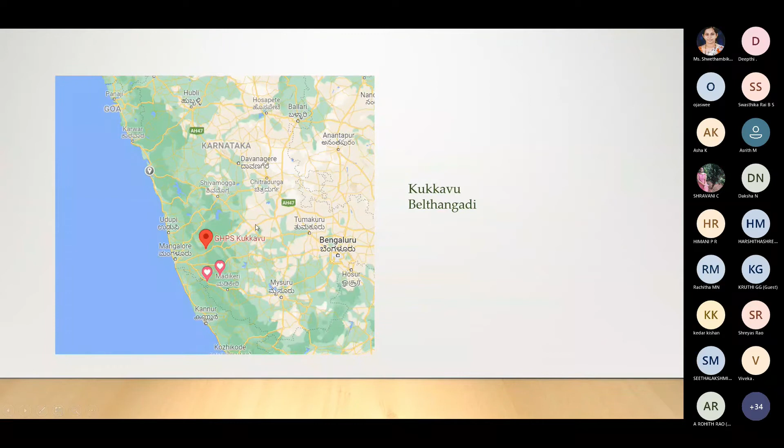Kukkavu is in Belthangadi Taluk, you can see the map here. It shows a government higher primary school, but it's the Kukkavu place. You can see a bridge here, the Kukkavu bridge, built across the Netravathi river at Kukkavu on the Somanthadka Didupe road. Some of you might have seen this or gone through this bridge. It's not like this now at present.

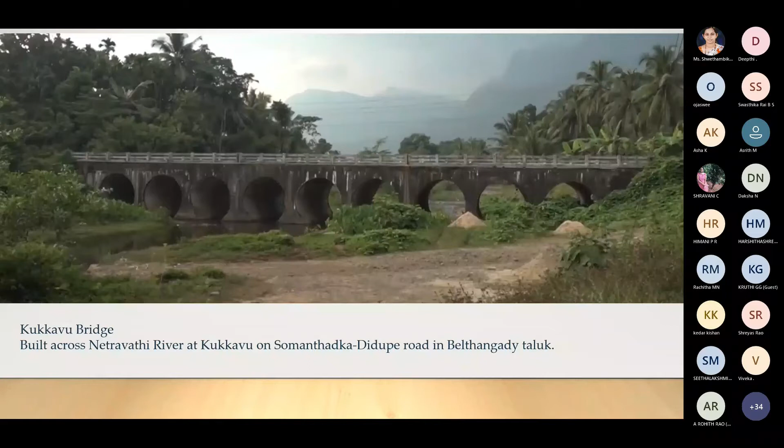In 2019, on August 9, there was a flash flood. Previously the bridge was like this, and after the flood, a part of the bridge was washed out. You can see this in the picture - a part of the bridge washed out and the road also damaged.

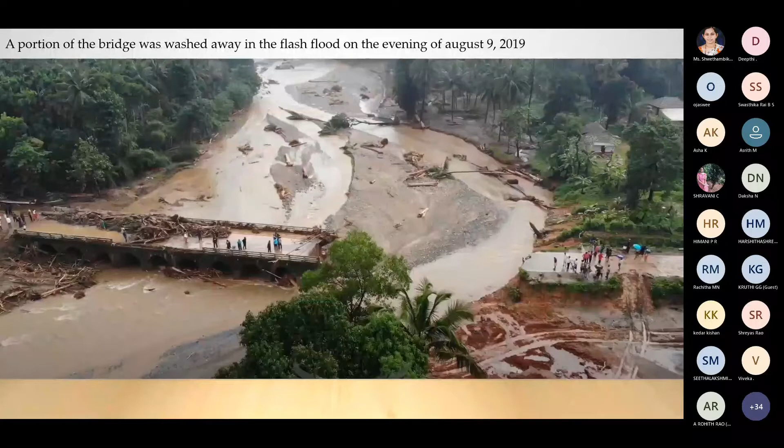In the evening, into the night, water came into the houses too. People suffered a lot in this flash flood. You can see so many fallen trees, and aggregates like jelly - in our civil language we call it gravel and jelly, sand - so many materials which can be used for construction can be seen here.

As I mentioned, the students took up the concept of testing whether these materials deposited by the flood could be used for construction. It wasn't a small amount - there was a much bigger quantity deposited, since it was a very large flash flood, meaning high intensity rainfall in a short time. So many piles of this material were there. They conducted a project to test whether these particles, pebbles, or aggregates could be used in construction, and at the end they performed several tests to determine this.

After completing all such experiments and tests, they came to a final decision that these aggregates cannot be used in major construction that needs to take more load, because they are not capable of providing sufficient strength. However, for minor, short-term use where load requirements are not much, they can be used, but not for major construction. This was their conclusion - these aggregates can't be used in building construction.

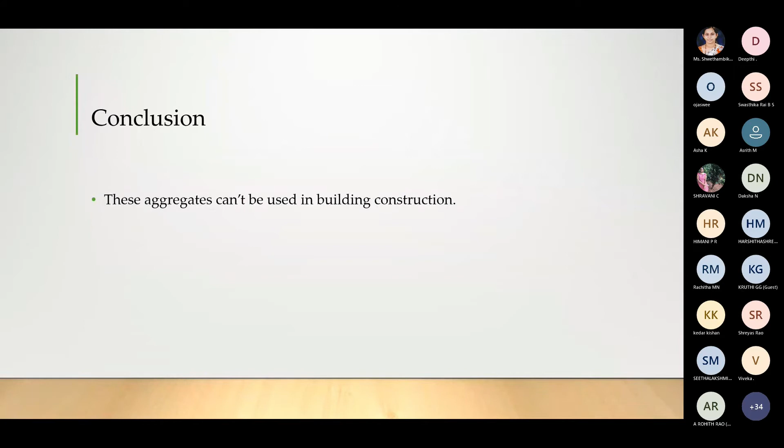That's the first project. The second project is 'Low Cost Housing for Rural Mass Sustainability' at Kulagrama, Puttur, DK. The students who did this project are Mr. Anup Anchal, Mr. Manoj, Mr. Nitesh Shake, and Mr. Pushparaj. This project was done under the guidance of Dr. Sandeep J. Naik sir, and the amount sanctioned by KSCST is 5,500.

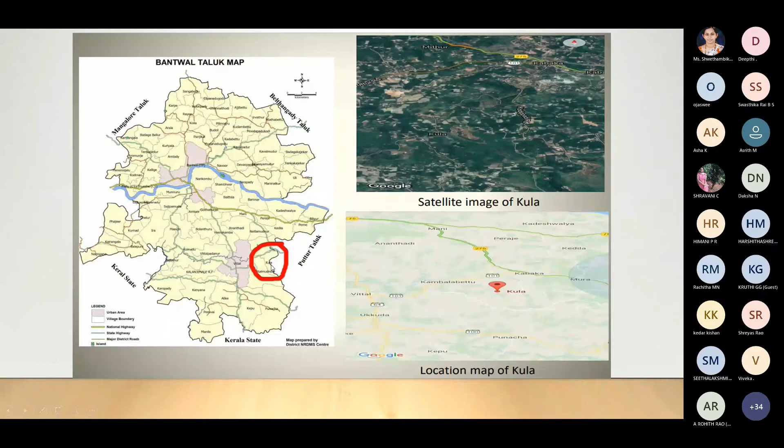Let me get into this - you can see Sandeep sir and all the team members here. Kulagrama is almost 9 kilometers away from Puttur, and it comes under Bantwal Taluk. Here is a satellite image of Kula village, along with the location map, showing where Bantwal Taluk comes. Kula is a village near Kabaka, 9 kilometers from Puttur, under Kula Panchayat, Bantwal Taluk, Dakshina Kannada district.

According to the Grama Panchayat records of Kula, the total population is 3,093, with 530 houses. The total area of Kula is 557 hectares. As we know, the population is increasing, and if population increases, the need for housing also increases.

Increasing need for housing is also a major area of concern for the government. Approximately one-third of Indians live below the international poverty line, so they can't pay much for housing. This is the main objective of this project: to find an alternate solution that is low cost, but it should also be structurally sustainable, not only concentrating on cost.

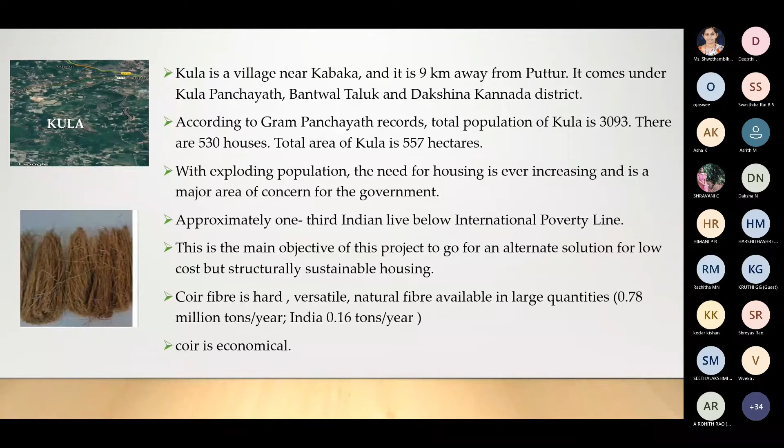In this project they have used coir fiber. Coir fiber, you might be knowing, it's coconut fiber, as shown in the picture here. Coir fiber is hard, versatile, a natural fiber, available in large quantity, and it is economical also. They have used this coir.

For this project, they have made a cement block. For that, they have used OPC, ordinary Portland cement of 53 grade, and gravel, that is baby jelly, then fine aggregate M sand, manufactured sand, and potable water. They have especially used locally available rural materials, that is coir fiber, of required length and diameter, with some thickness.

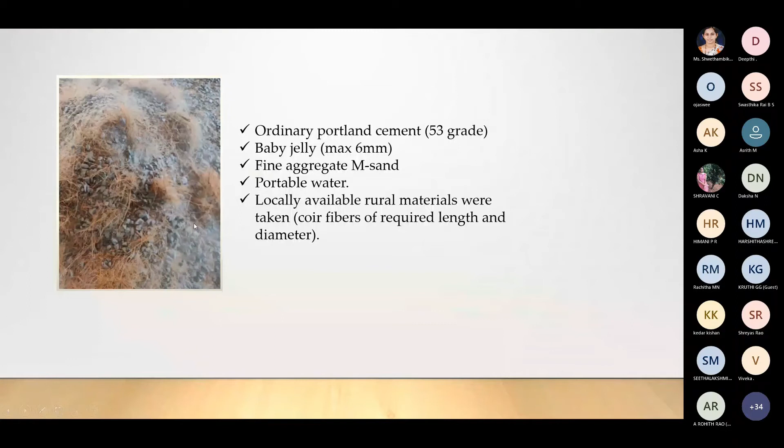Mixing has to be done. Before that, they have taken fine aggregates, coarse aggregate and all. For that, different tests have to be conducted on cement: fineness of cement, specific gravity, normal consistency, initial setting time, slump test, all these tests have to be conducted.

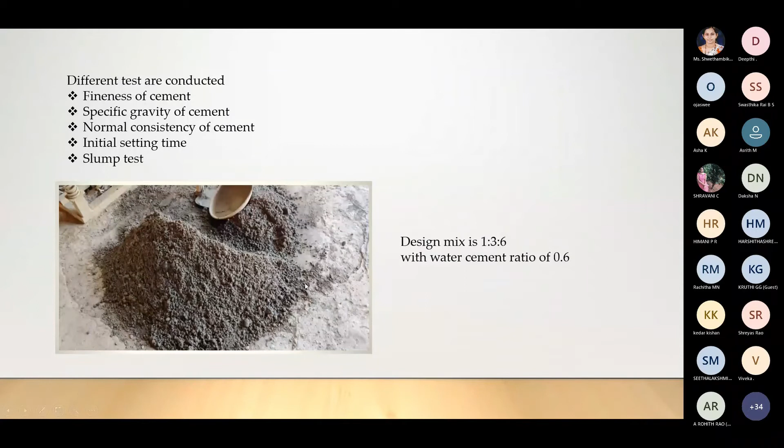Then they have mixed cement, sand, and baby jelly. The design mix is 1 is to 3 is to 6, cement, sand, and jelly, with a water cement ratio of 0.6. These are the things they used along with coir fiber. Coir fiber content was 0.5% to 2% by total weight of cement, M sand, and baby jelly. They have results for 0.5%, 1%, and 2% coir fiber, and then compared the strength at the end.

Then proper mixing is done, and they have prepared the cement block with the coir fiber, as you can see here. Then curing has to be done for 7, 28 days, adding water, and before testing it has to be properly sun dried.

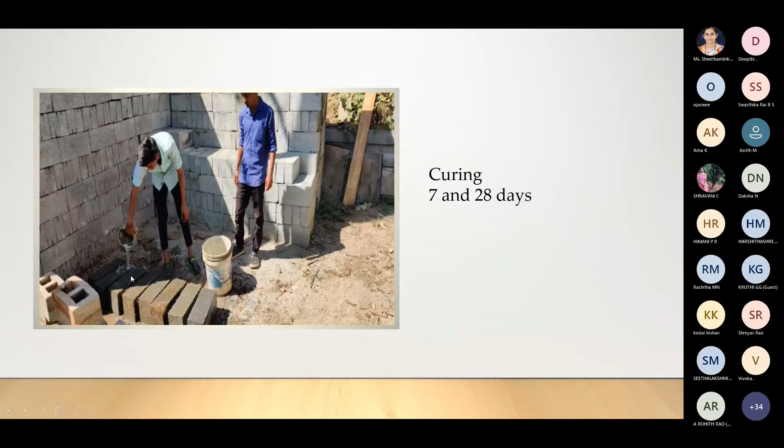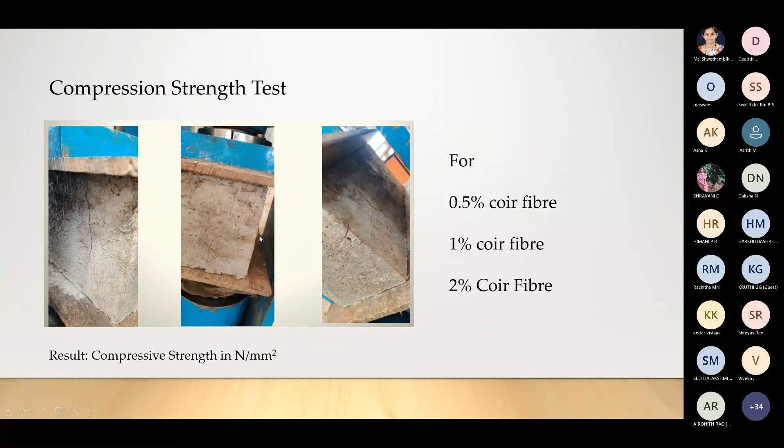Then they calculated and tested the compression strength for 0.5%, 1%, and 2% coir fiber, getting results of compressive strength in Newton per mm square. What they concluded is that addition of fiber more than the optimum adversely affects the compressive strength. If you add more fiber, strength will decrease. The compressive strength for 0.5% fiber was 4.1 Newton per mm square. So an optimum minimum design was found in this project, but if you increase the fiber percentage, compressive strength of course decreases. This is the result of this project.

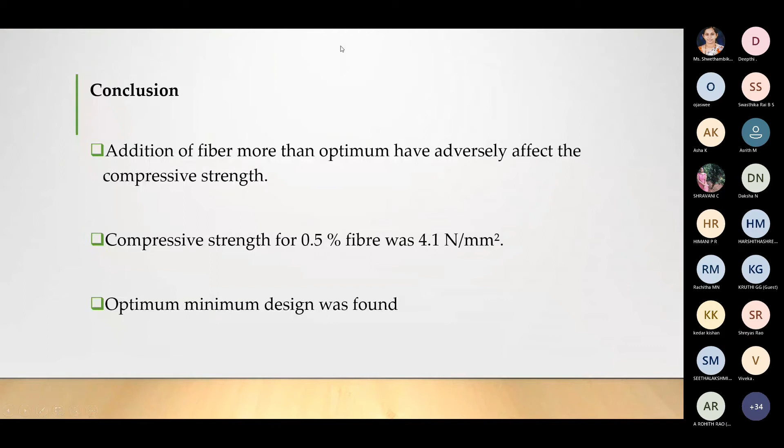Next project: optimization of irrigation efficiency using soil and pedotransfer functions. This project is done by Ms. Rashmi Eskulal, Ms. Sarika B, Ms. Shravanya N, and Ms. Swati Naik, under the guidance of Dr. Sandeep Jain Naik sir and Prashant sir. The amount sanctioned from KSCST is 4,500 rupees.

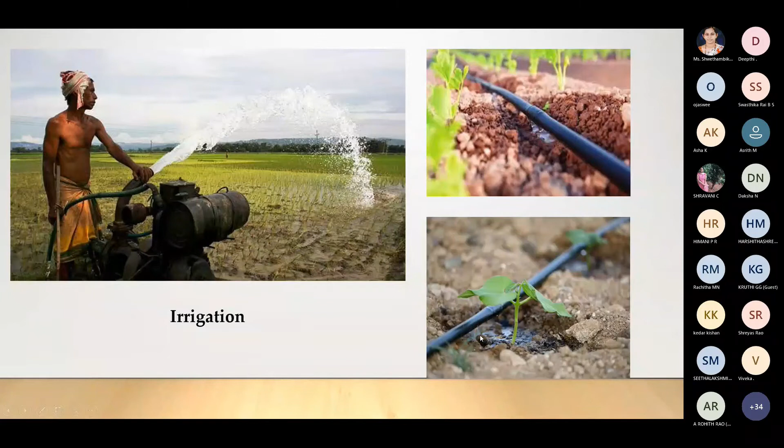All of you know about irrigation, right? Here they are using pumps for irrigation, drip irrigation, micro irrigation, using sprinklers also. What is irrigation? It is the process of supplying water to land by artificial means for the purpose of cultivation, in order to grow more food or agricultural products in large quantity, to feed the increasing population.

Intensive farming is systematic farming, where with more input we are getting more output. Rotation of crops is essential for this. For all these things to be done, irrigation should be proper; there should be systematic irrigation.

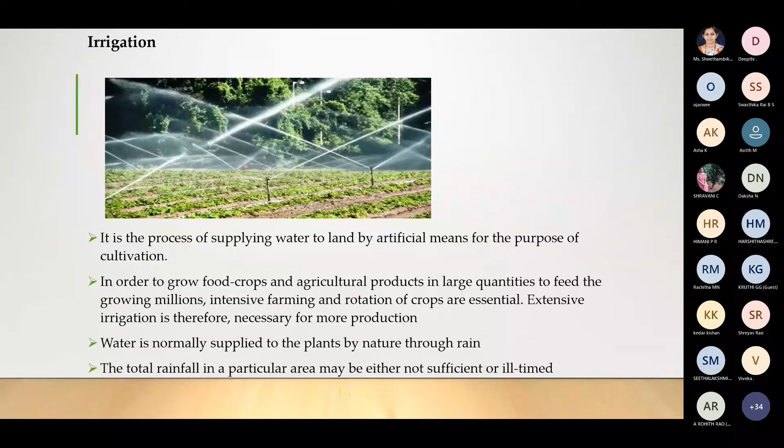Water is normally supplied to plants by nature, through rain. The total rainfall in a particular area may either be not sufficient or ill-timed. Sometimes there may be rain, but when the plants need water, rain may not come — it is a problem they are facing. In order to get the maximum yield, it is essential to supply the optimum quantity of water and to maintain correct timing of water.

Not only supplying the water, there should be correct timing. At the correct time, water should be gotten by the farmer. This is possible only through a systematic irrigation system by collecting water during the time of excess rainfall and releasing it to the crop when it is needed.

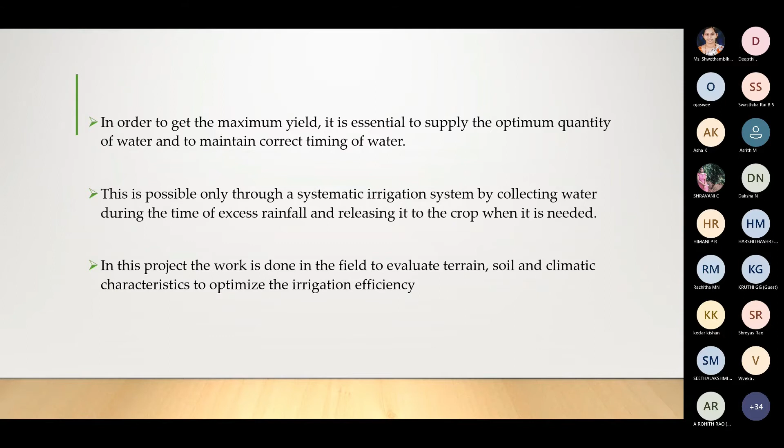When there is excess rainfall, much water is there, right? We have to collect it and use it when needed. In this project, the work is done in the field to evaluate terrain, soil, and climatic characteristics to optimize irrigation efficiency.

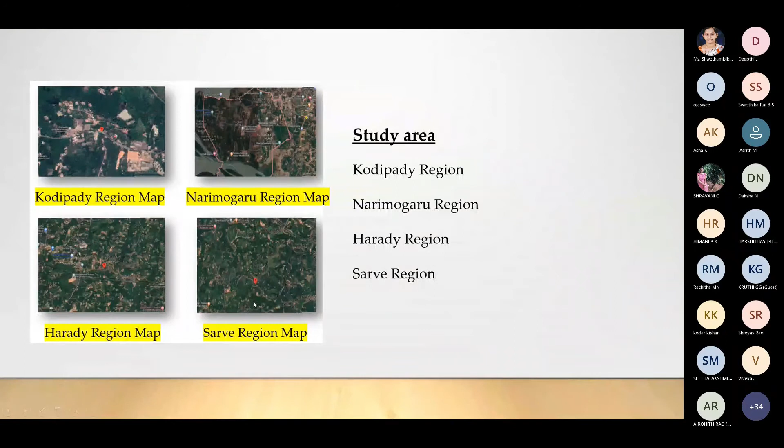They have taken and studied the regions - 4 regions: Kodipady, Narimogaru, Harady, and Sarve. The methodology involves map study - which area they have taken, they have studied that area, its terrain and all, collecting the agricultural detail, which are the major crops in that area, and selecting a suitable site for the test. They have selected this site for their test.

Then conduction of the test - moisture content test, permeability test, infiltration, field capacity, sieve analysis. For moisture content, they have conducted one test, it may be a core cutter method and all. And for permeability and infiltration, they have used the double ring infiltrometer method.

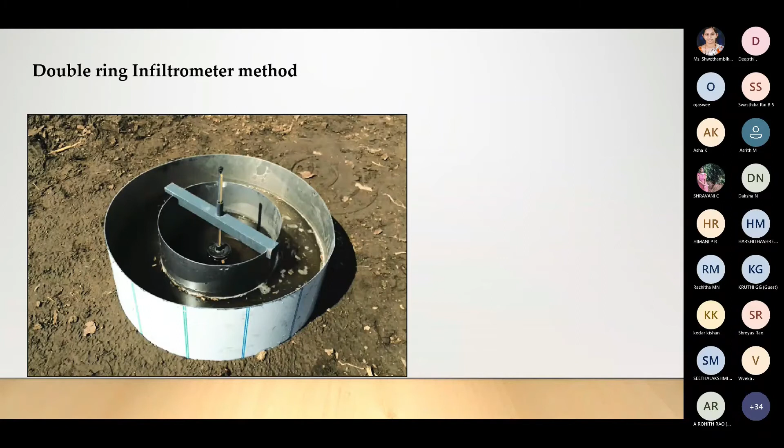Next is getting the equation for pedotransfer function. An equation or model developed for indirect estimation of a particular soil property is termed as a pedotransfer function. A PTF adds value to this basic information by translating it into estimates of other more laborious and expensively determined soil properties.

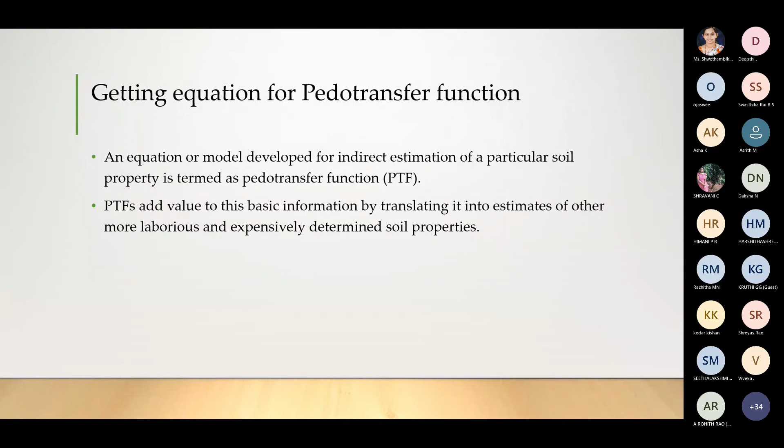Hello, Shravani. Yes ma'am, your audio is stuck. Oh okay ma'am, I was muted in between. Okay, I will. From this particular slide, okay? Okay ma'am, yeah, thank you ma'am.

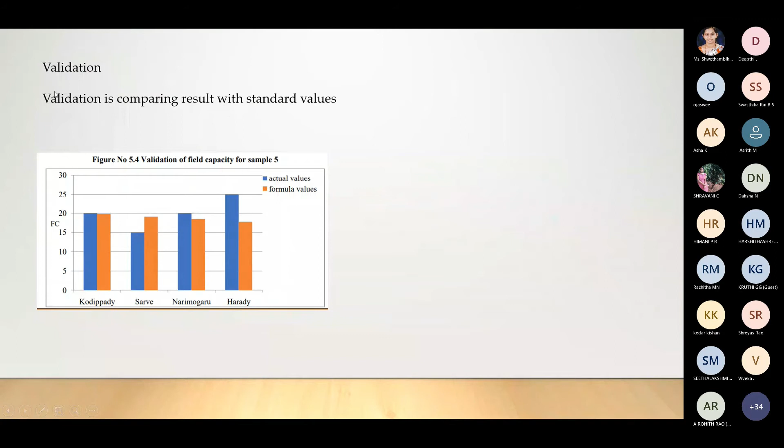They validated it. Then calculation of statistical physiochemical soil properties in Puttur region - soil physical properties such as sand, silt, or clay, pH of the soil, cation exchange capacity, water content, bulk density, nitrogen, phosphorus, potassium, and infiltration were also used for developing pedotransfer functions. Then they go to the next step.

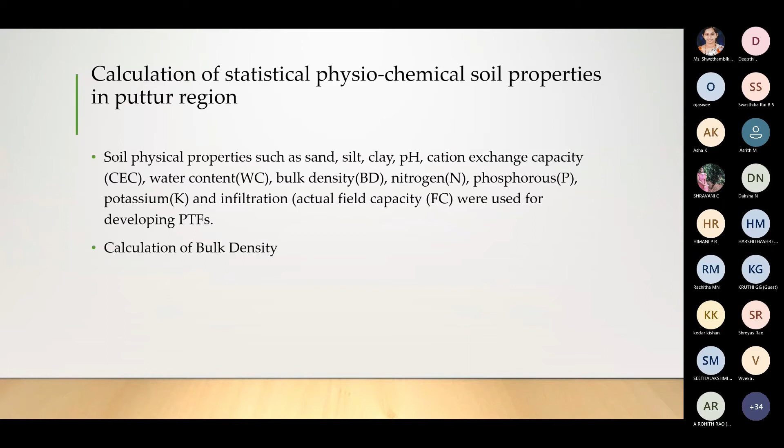It is a bulk density calculation - what is the density of that soil. They have given the result in a tabular format - at Kodipady, at Narimogaru, what is the pH, what is the water content, what is the amount of nitrogen. Like that, they have tabulated the result and the estimation of different parameters through pedotransfer. Using this result, they have done other calculations to estimate the different parameters.

At the end, they have come to the conclusion that the performance of a sprinkler or drip irrigation system requires less water compared to other traditional systems. However, their performance is often assessed based on the water uniformity coefficient collected in catch cans - they collect water in that and calculate the amount collected. Sprinkler spacing, operating pressure, and environmental variables such as wind speed and direction affect the water distribution.

We can't ignore the wind speed and direction of wind, it also affects the uniformity coefficients in the study area, which are determined by different formulas suggested by authors. Greater the uniformity coefficient, the more efficient will be the irrigation system.

In drip irrigation, the loss of water is less. Only the minimum quantity of water is used and it will be sufficient for that plant. In addition, under heavy wind conditions, keeping laterals perpendicular to the wind direction and bringing sprinklers close together will enhance uniformity in sprinkler irrigation.

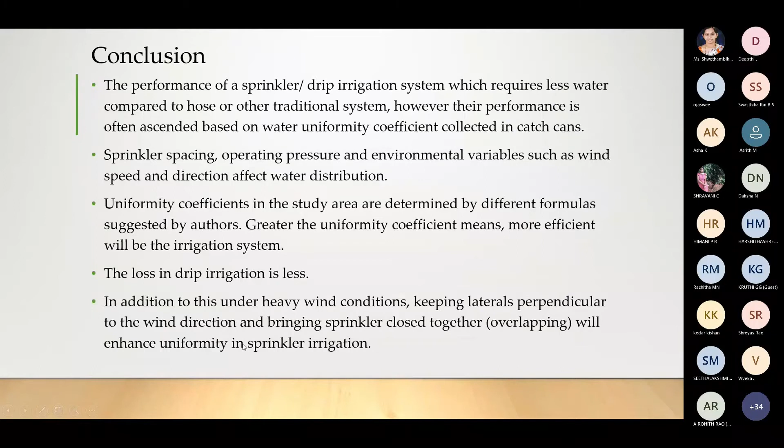That is their conclusion. If their project is selected by KSCST, they will get a letter like this, and they will give the sponsored amount - for material 4,000, report 500, like this. There's one more page, but I'm not showing that here.

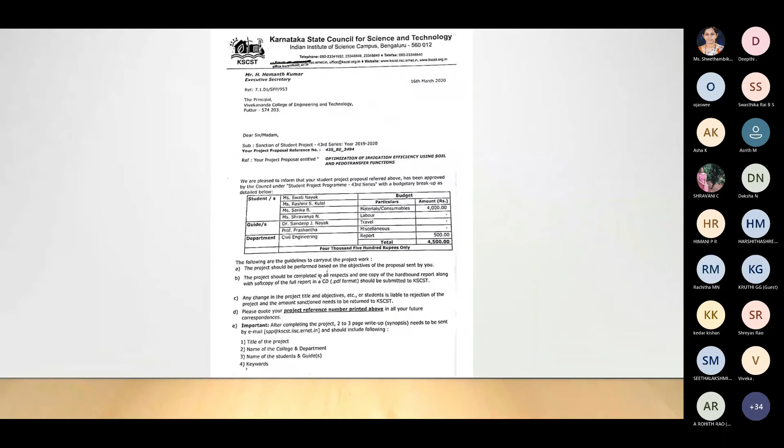The students who undertook this project are Rashmi S. Kutal, Sarika, Shravanya, and Swati, guided by Sandeep sir and Prashant sir.

Let me go to the 44th series after this, because only 3 projects of the 43rd series I have finished. I have one more, right?

Introduction: fresh water today is a scarce resource, and it is being felt the world over. Actually it is in less quantity, but nowadays, since the usage of fresh water is more, we have scarcity of it. As population is increasing, the source of high quality fresh drinking water decreases.

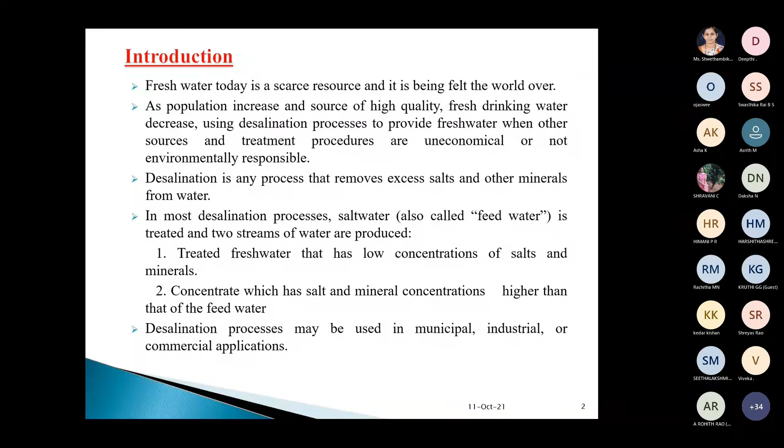Desalination processes may be used in municipal, industrial, and commercial applications. The pure water obtained after desalination must be remineralized to be adequate for human consumption.

The feed water or salt water for the desalination process can be seawater or brackish water. Brackish water contains more salt than fresh water but less than sea water. It is commonly found in estuaries, which are the lower courses of rivers where they meet the sea.

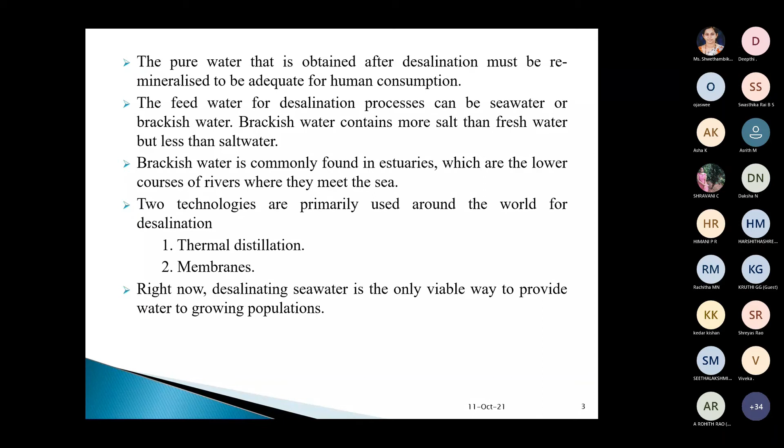Two technologies are primarily used around the world for desalination: thermal distillation and membranes. Right now, desalination of seawater is the only viable way to provide water to a growing population.

How it is done: seawater or brackish water gets into the desalination plant, where the natural filter will be there, then filtering gives us the desalted water.

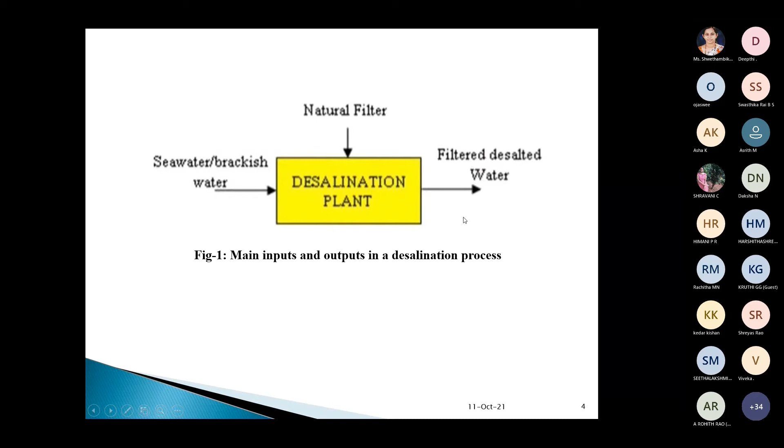Cost-effective technique of desalination - I will say all this in brief. In most plants, after the desalination process, 2 products are there. The second one, with higher concentration of salt, they put back into the sea, which is not good for the marine environment.

They release that higher concentration salt product back to the sea. That salt part they release again to the sea, which is not good for the marine environment, so that technique should not be used.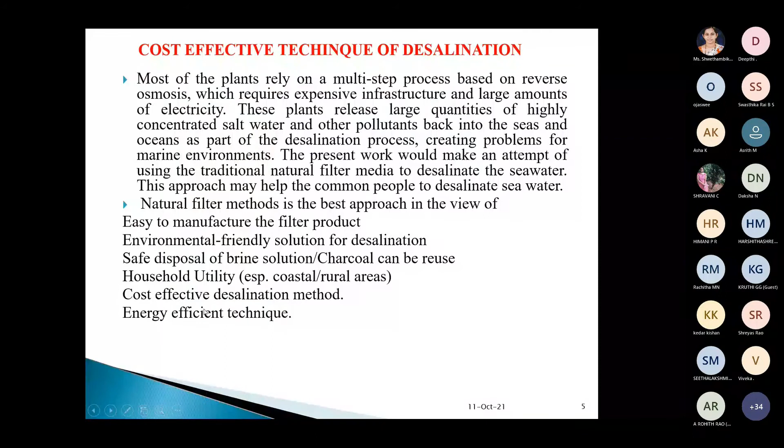But what they did in this project is the natural filter method - easy to manufacture the filter product, an environmentally friendly solution for desalination, safe disposal of brine solution, charcoal can be reused, household utility, cost-effective desalination method, and an energy efficient technique. This is the plus point of their project.

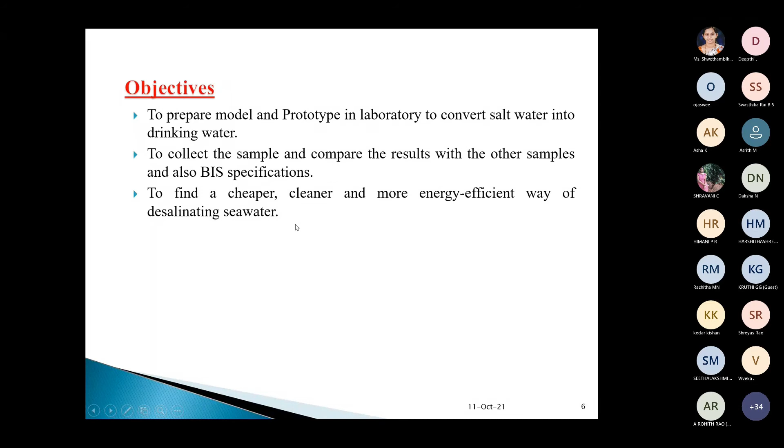The objective is to prepare a model and prototype in the laboratory to convert salt water into drinking water, collect the sample, and compare the results with other samples as well as Bureau of Indian Standard specifications, to find a cheaper, cleaner, and more energy efficient way of desalinating seawater.

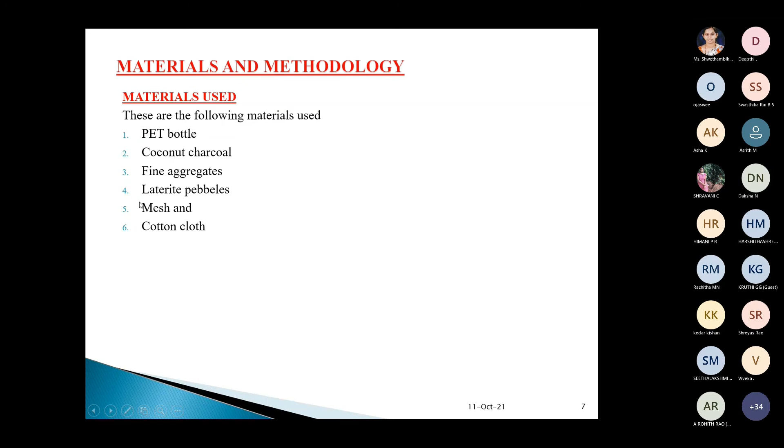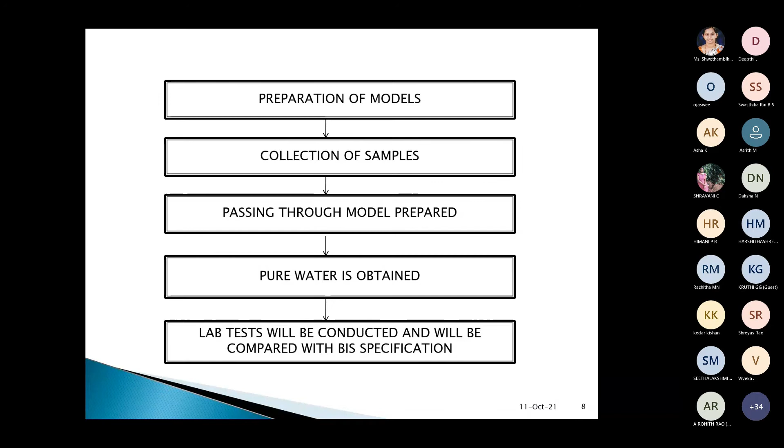The materials used are PET bottle, coconut charcoal, fine aggregate, laterite pebbles, mesh, and cotton cloth. The first step is preparing the model, then collecting the sample, passing it through the model prepared, pure water is obtained, then lab tests will be conducted and compared with the BIS specification, that is Bureau of Indian Standard. This is the setup procedure for prototype 1.

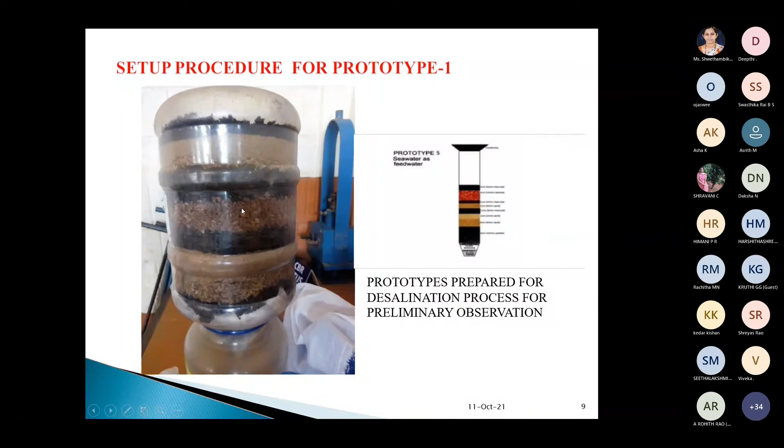You can see different layers, right? I will explain what those layers are. The bottle top cover is cut.

Inside the bottle, cotton cloth is placed, then wire mesh of size 2 mm is placed, and another layer of cotton cloth and mesh is placed to block smaller particles from getting into the fresh water. To avoid that, cotton cloth and mesh is provided. Then coconut charcoal is placed, of size 2.36 mm, to 10 centimeter thickness.

Then fine aggregate of a lesser size, then again coconut charcoal of a somewhat larger size, then laterite pebble, then coconut charcoal of some more larger size, then fine aggregate of more size, then coconut charcoal with the top layer of size 4.75 mm of 4 centimeter.

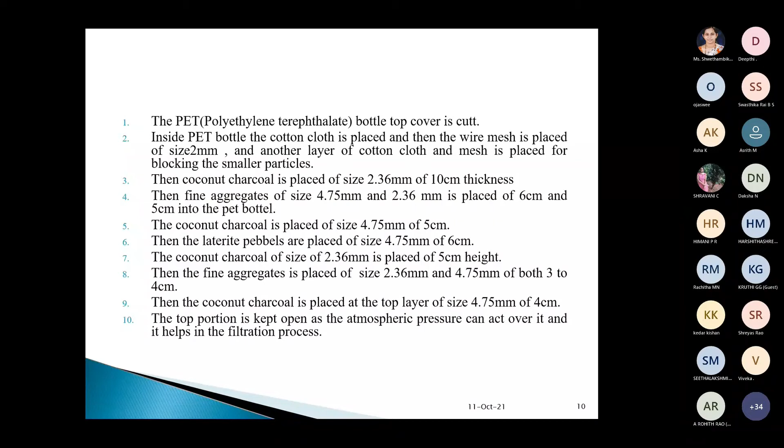The top portion is kept open. Why? Because atmospheric pressure can act over it and it helps in the filtration process.

Working procedure: in this experiment, the seawater is collected from Panambur beach and the brackish water is collected from Thanniru Bhavi. Then the initial test of the water sample is performed at the lab. Then the water sample is poured into the model which we have seen right now.

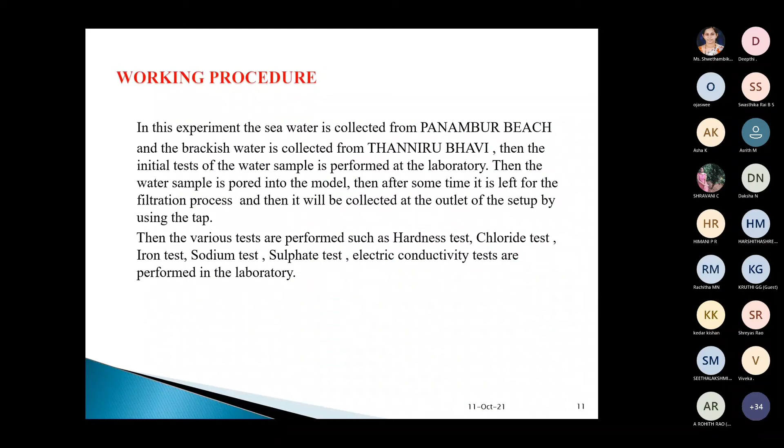After some time it is left for the filtration process, and then it will be collected at the outlet of the setup by using the tap. Then various tests are performed, such as hardness test, chloride test, iron, sodium, sulfate, electric conductivity - all those tests are performed.

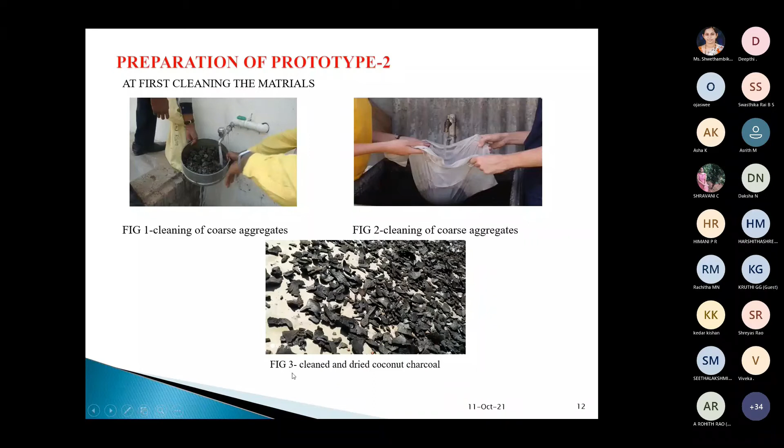Setup procedure for prototype 2: it is also almost the same. Three layers are placed - first layer coarse aggregate, second layer fine aggregate, third layer coconut charcoal. Like that, almost the same with different sizes.

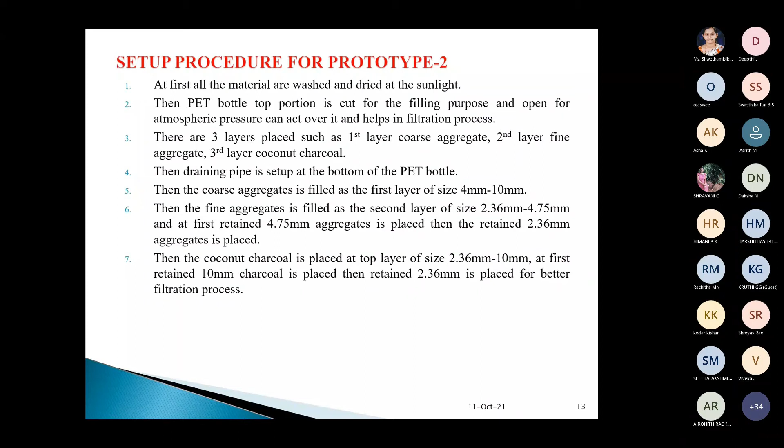At the top, there should be larger size because water has to penetrate. While coming to the bottom, no smaller particle should pass through it, meaning cloth and mesh is used for that. Just like prototype 1, it's a setup - filtration unit, draining pipe setup, and fill the coarse aggregate, fine aggregate, and coconut charcoal.

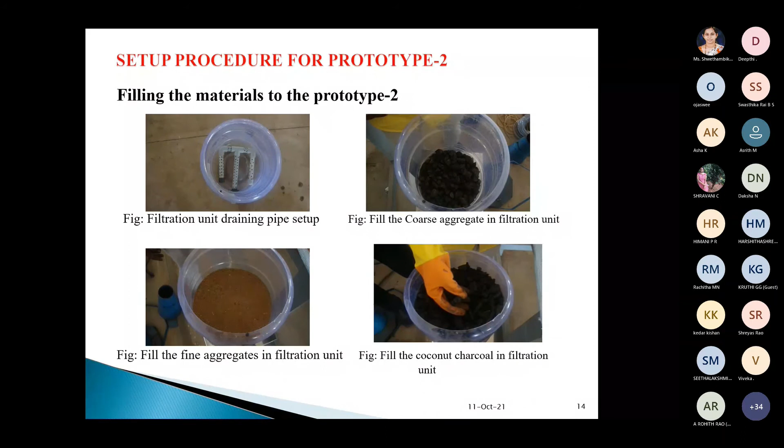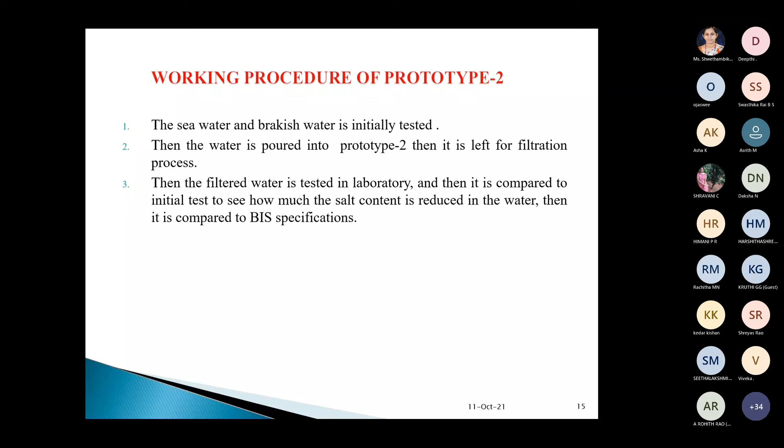Working procedure: the seawater and brackish water is initially tested. Then the water is poured into prototype 2, then it is left for the filtration process. Then the filtered water is tested in the lab, compared to the initial test, to see how much of the salt content is reduced. This is the final setup for prototype 2.

This is a result of what they have got before desalination and after desalination process. What is the total hardness? It's decreased, right? Chloride content, sodium, electric conductivity, like that.

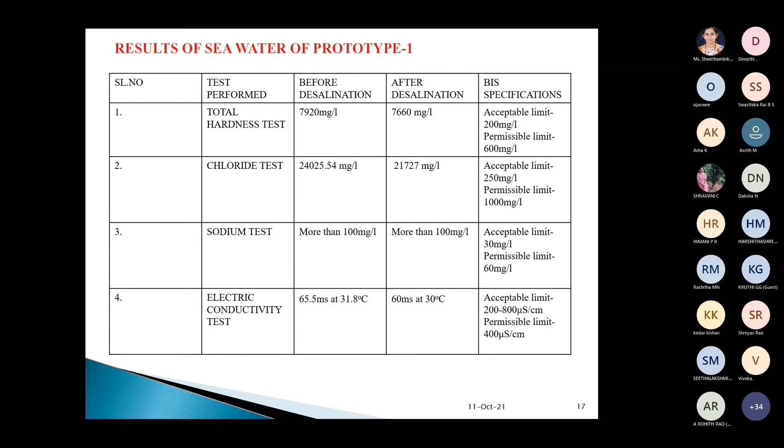by using locally available natural filters, which is an eco-friendly, cost-effective technique and can be easily afforded by common people.

The sodium content is more than 100 milligram per liter in seawater. The electric conductivity of seawater is 65.5 ms and after desalination it was reduced to 60 ms at 30 degrees Celsius. This is a result of their project.

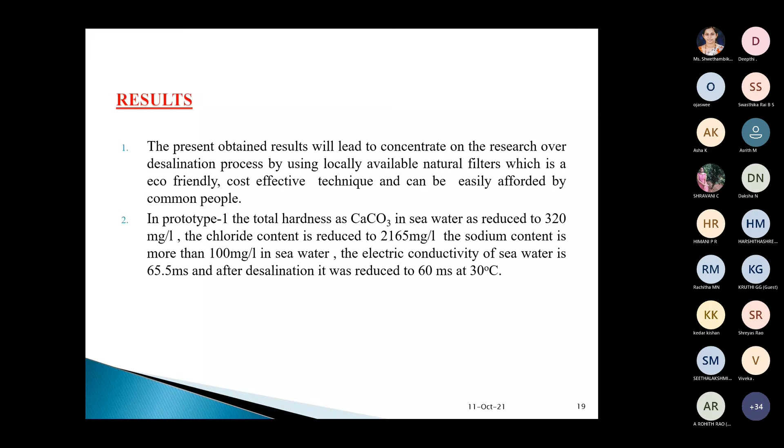In conclusion, the present approach is done by using locally available natural filter and it is eco-friendly. As per the result, the hardness is reduced, chloride content is also reduced. This is their conclusion.

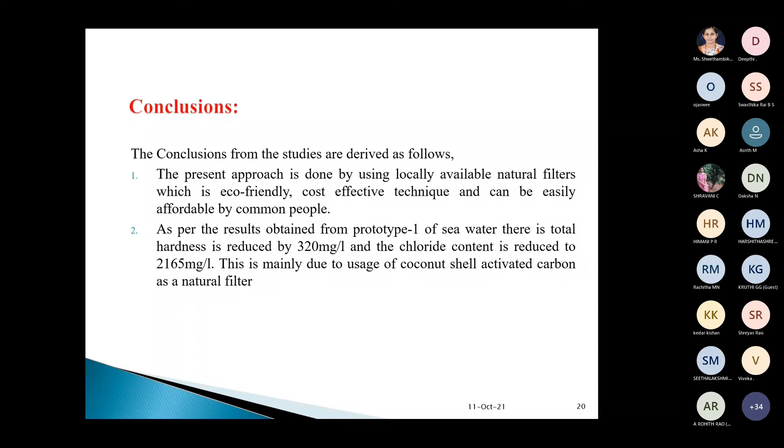This is the 43rd series. I will just give a look at the 44th series of KSCST. One minute.

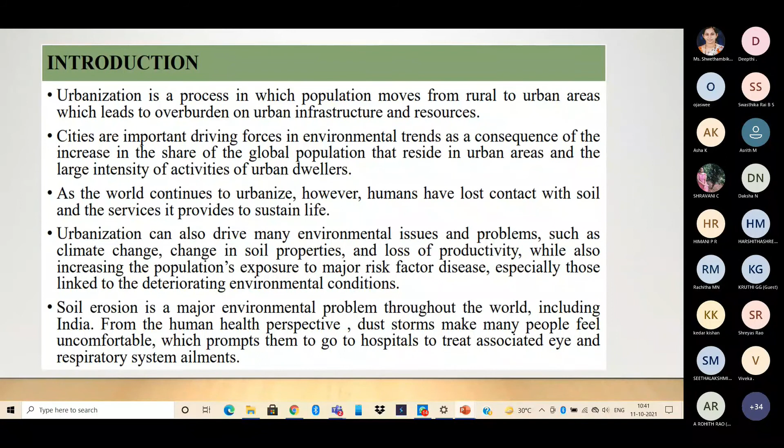I will tell you this in brief. Urbanization is a process in which population moves from rural to urban areas, which leads to overburden on urban infrastructure and resources. As the heading says, impact of urbanization on soil property - how it has changed, what is the soil property now and what was it before. They have studied Puttur town only.

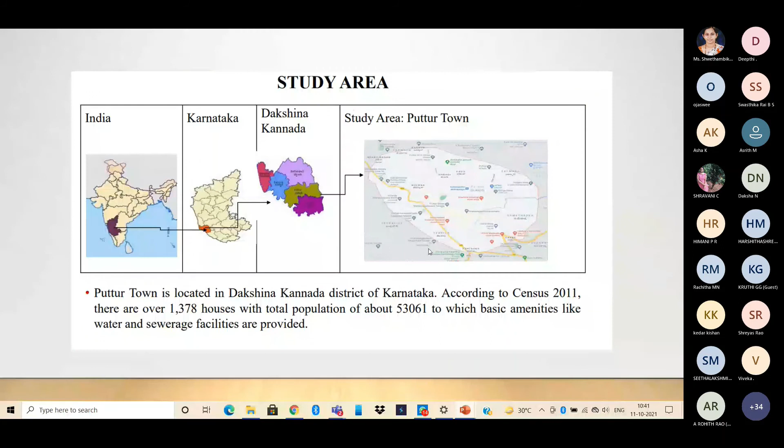The objective is identification of wastewater disposal location of various establishments - how wastewater affects the soil property - and evaluating the impact of urbanization on soil properties. This is the process method.

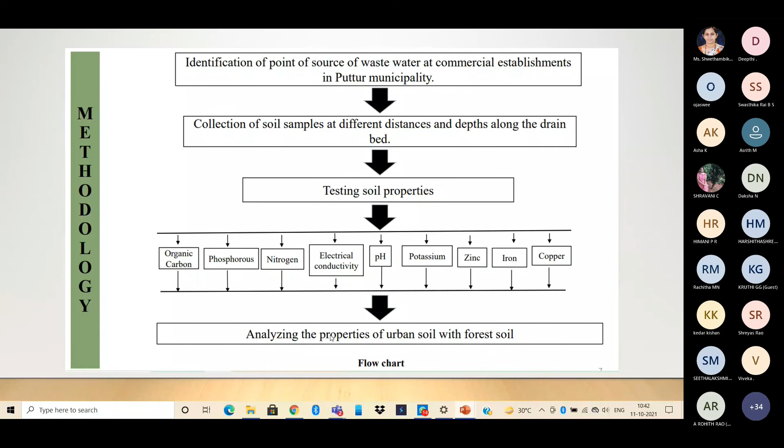They have done identification of point of source of wastewater at commercial establishments in Puttur municipality, then collection of soil samples at different distances and depths along the drain bed, testing soil properties - organic carbon, pH test, potassium, everything - then analyzing the properties of urban soil with the forest soil.

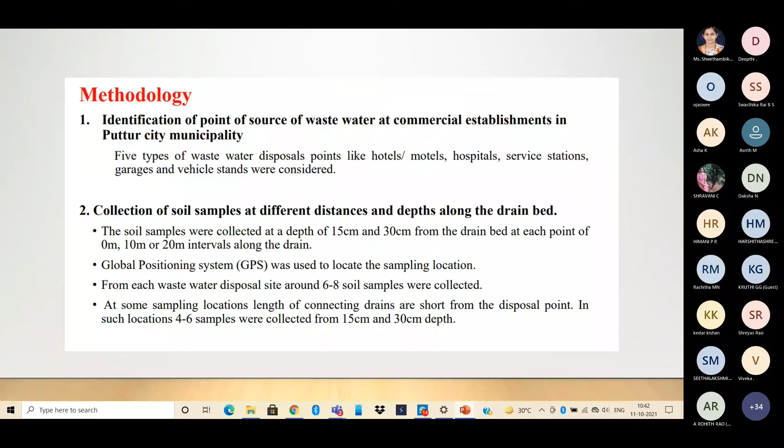Methodology is the same thing I mentioned - identification of the point of source from where the wastewater is coming and collection of soil, using the core cutter method.

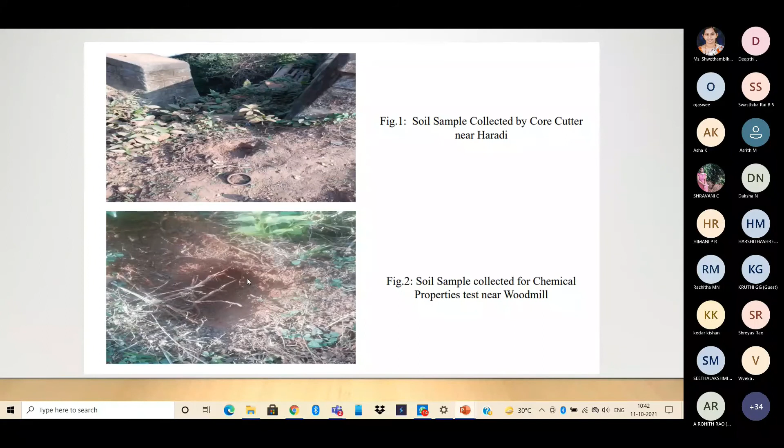Soil sample collected by core cutter near Haradi, then soil sample collected for chemical properties test near wood mill. Tests on soil properties include iron, copper, zinc, phosphorus, nitrogen amount, electrical conductivity, organic carbon, pH, and potassium - every test was conducted by them.

The result of the potassium test - I'm just giving this result - at 15 centimeter depth and 30 centimeter depth, they have taken results at 0 meter interval, 10 meter interval, and so on.

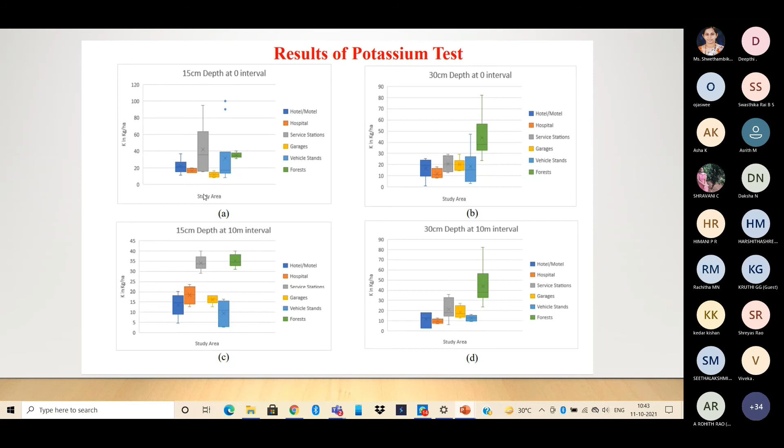It is 15 centimeter depth at 10 meter interval. For the pH test also, the wastewater from the hotel shows a lower pH, while the maximum pH is from garages, ranging from 4 to 7.

Acidic, basic - you might be knowing. Okay.

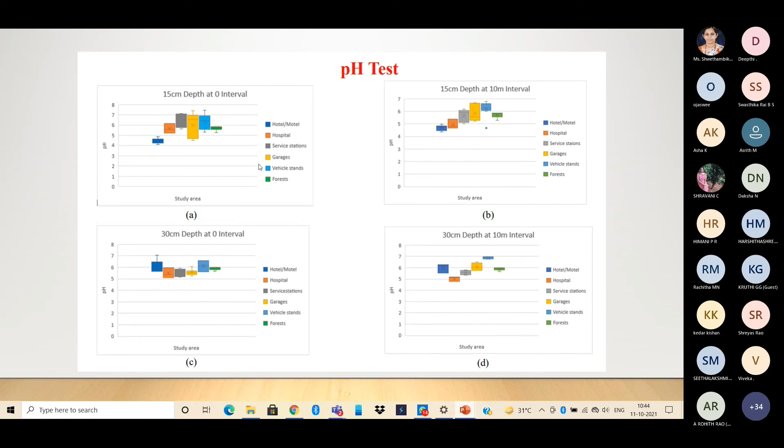I have mentioned just the pH test and all, right? Other tests were also done - I didn't show them here, just like pH. They have tabulated the results in a bar chart for zinc test, iron test, copper, phosphorus, organic carbon, nitrogen, and electrical conductivity test - all those tests they conducted during their project time.

The conclusion is urbanization in Puttur town shows changes in soil properties compared to forest land. Forest land, of course, is different - there won't be any urbanization, so it can be taken as a standard to refer to how much it is affected. The effect is found more in nitrogen and organic carbon of soil.

The soil properties such as electrical conductivity, phosphorus, nitrogen, organic carbon, zinc, copper, and pH of soil decrease as urban land increases. The land degradation is more on the surface and decreases along the length of the drain, maybe due to infiltration of wastewater. This is the conclusion of this project.

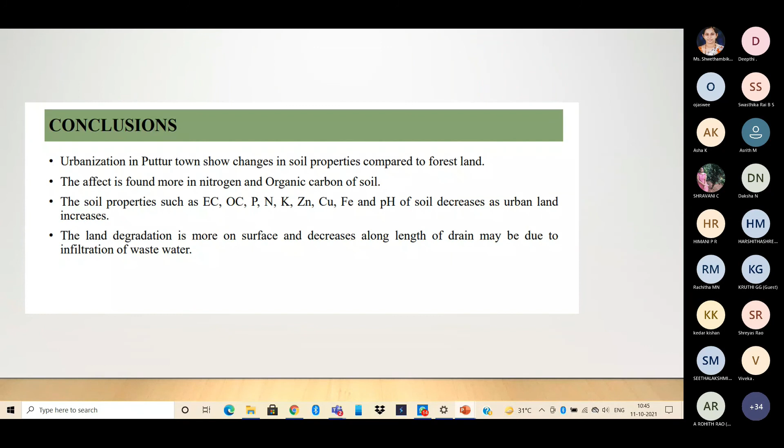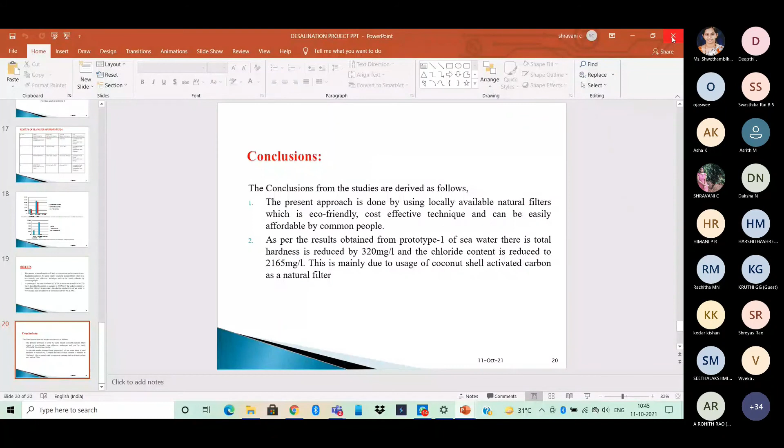Okay, last project - I will say the title first.

Predicting the land use and land cover changes of Puttur Taluk, Dakshina Kannada using remote sensing and GIS techniques. This project is done by Mr. Nishant Reyes, Ms. Sahana HM, Ms. Nishkala B, and Ms. Pavitra BR under the guidance of Sumant sir and Soumya NJ ma'am.

Introduction: Land use, land cover generally refers to the categorization or classification of human activities and natural elements on the landscape within a specific time frame. Land use involves the management and modification of natural environment. Land cover refers to the physical characteristics of Earth's surface - the vegetation, water, soil, and other physical features of that land. Land use and land cover change assessment helps detect the extent of human influence on the natural environment.

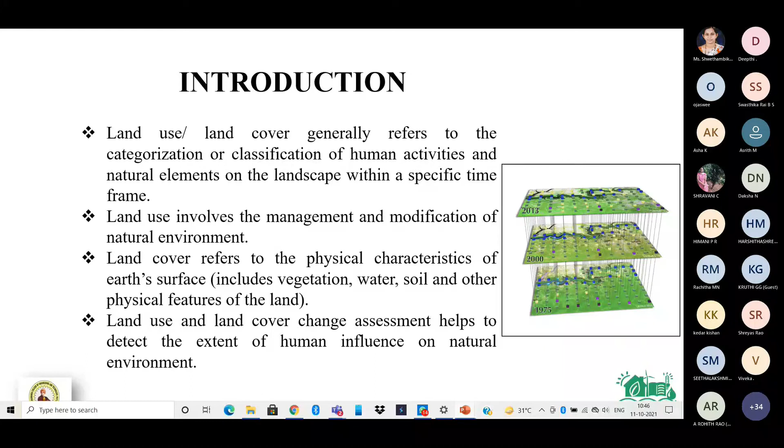They have used GIS, that is Geographic Information System, and remote sensing to do this project. The need for this study is that land use and land cover mapping is important for the planning and development of the land parcel. The remote sensing data combined with field survey data can provide a unique and hybrid database for optimal mapping of land use and land cover.

LULC, that is land use land cover maps, plays a significant and prime role in planning, management and monitoring programs at local, regional and national levels. This type of information provides a better understanding of land utilization aspects, and also plays an important role in the formation of policies and programs required for development planning.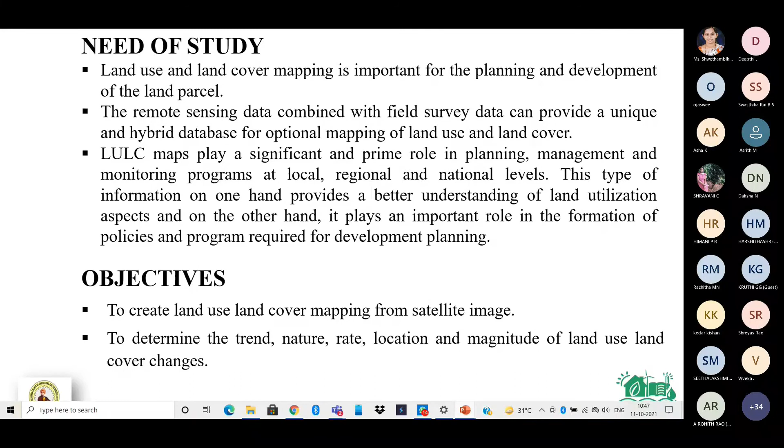Data used is topo sheets, that is the topography of that area, and LISS 3 and LISS 4, that is satellite images, and Landsat images. The softwares used are ArcGIS 10.1 and ERDAS Imagine 2014.

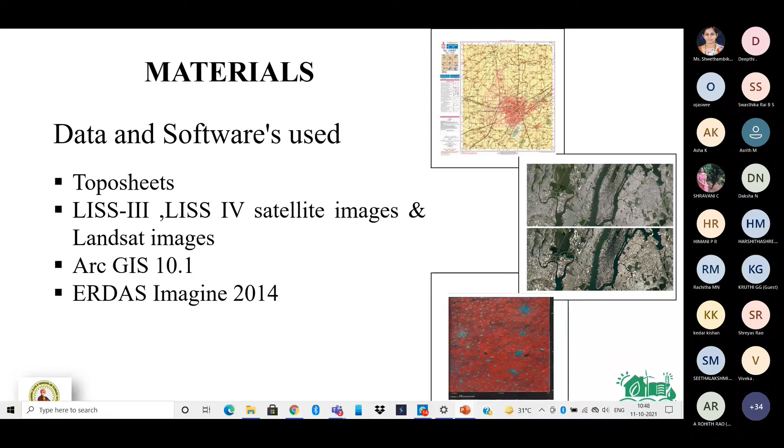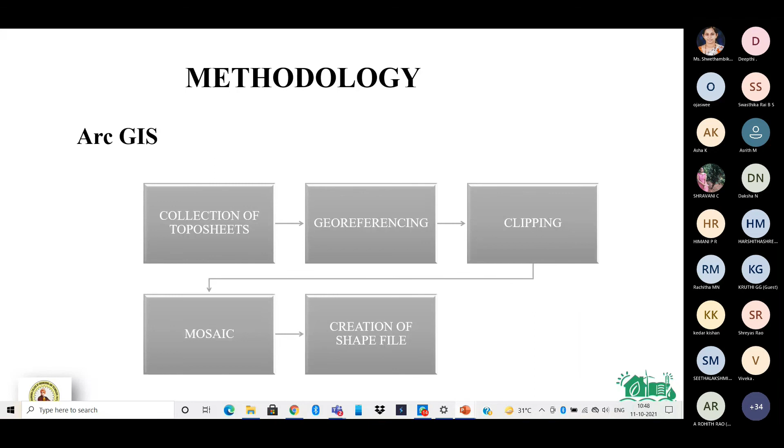Methodology for ArcGIS software: collection of the topo sheets, then georeferencing, clipping, mosaic, and creation of shapefile. Georeferencing and mosaicing of topo sheets, then creating the shapefile. In this project, they created the shapefile using the software.

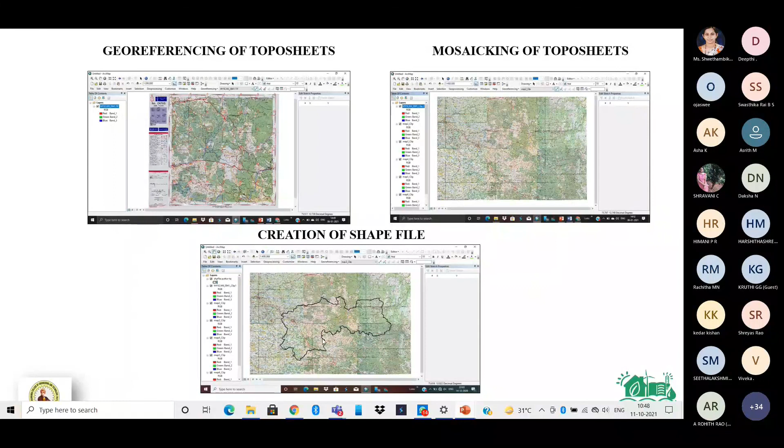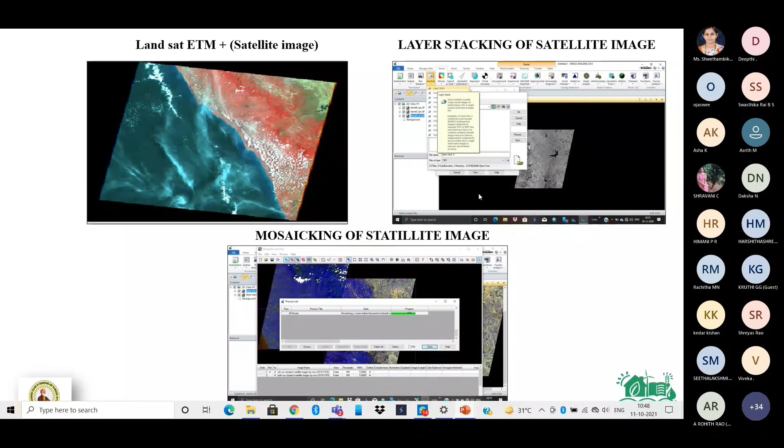ERDAS is a software. The methodology is collection of satellite image, layer stack, mosaic, overlaying of shapefile on satellite image, extracting the satellite image related to study area, then creating the LULC map. It is Landsat ETM+, that is satellite image, layer stacking of satellite image. All these things have been done using the software.

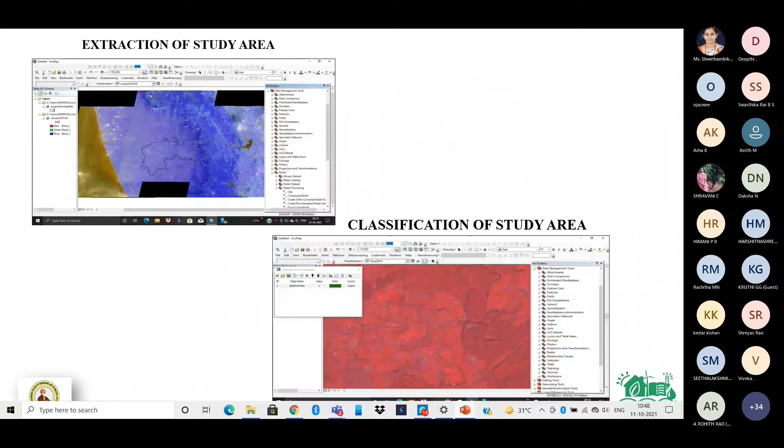Extraction of study area, classification of study area. If you get a chance, you can learn this software.

Result and discussion: this is the land use land cover map of 1998. Like this, they have done for different years. In 1998, what is the vegetation, what is a water body, built up land, ridge, agriculture, fallow land - everything in the area, the percentage they have listed.

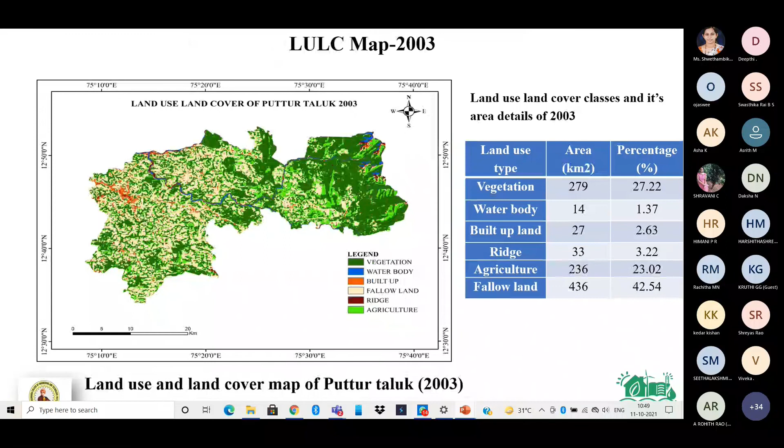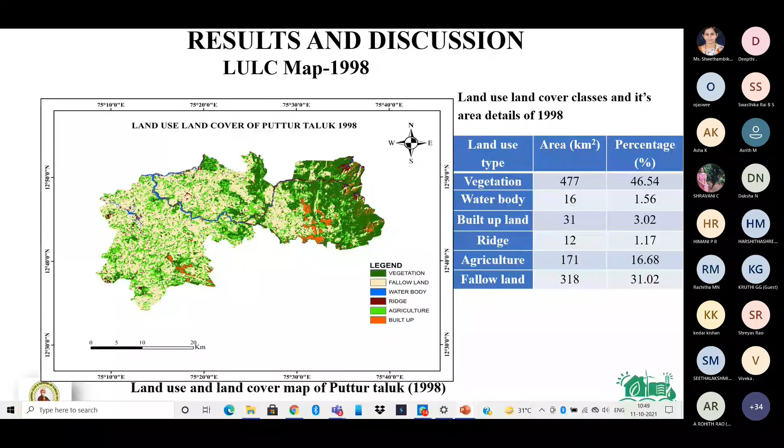In the same way, it is done for 1998, 2003, 2008, 2013, and 2019. At 2019 the vegetation is 182, whereas in 1998 it is 477. It is decreased, vegetation is decreased. This can be compared using a bar chart also.

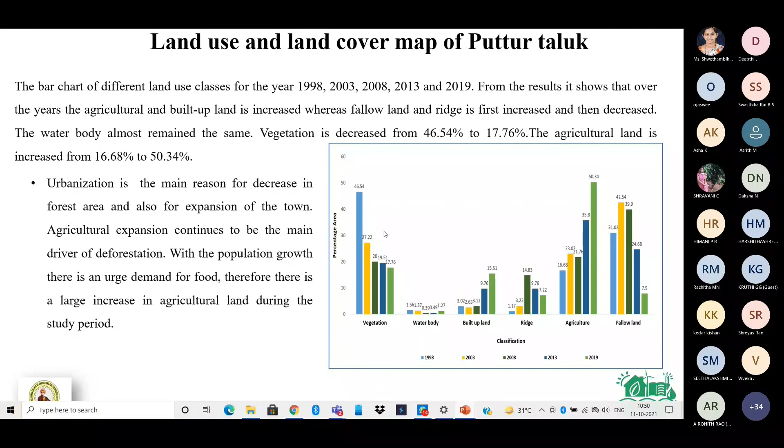You can get all those details by bar chart also and the previous photos. The conclusion is the change in the LULC in the study area majorly affected the agricultural land.

Agricultural land main effect. The agricultural area is increased because human expansion throughout the world caused agriculture to be a dominant form of land management globally. Human influence to the land is accelerating because of rapid population growth and increasing food requirements.

Comparing the LULC of 1998 with 2003, 2008, 2013 and 2019, major changes are observed under agriculture. We have seen those things in a bar chart also, right? Yeah, major changes are observed in the agriculture field.

Fallow land and built up also showed major changes. Agriculture area is increased by 33.66%.

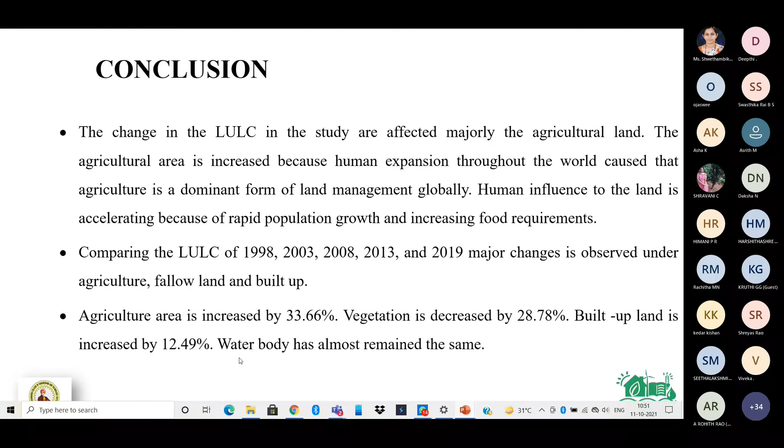It is the result of their project, which result they got by doing that project. Vegetation is decreased by 28.78%. Built up land is increased by 12.49%. Water body has almost remained the same.

This project which I have been explaining right now - land use, land cover, and all - this project got the award as the best project, the best project award 2021.

In that they have done data collection, field simulation and modeling. For this project, the best project of the year award was given in 2019. And one, 2020-21 recently, the best project award is given to the Land Use Land Cover project.